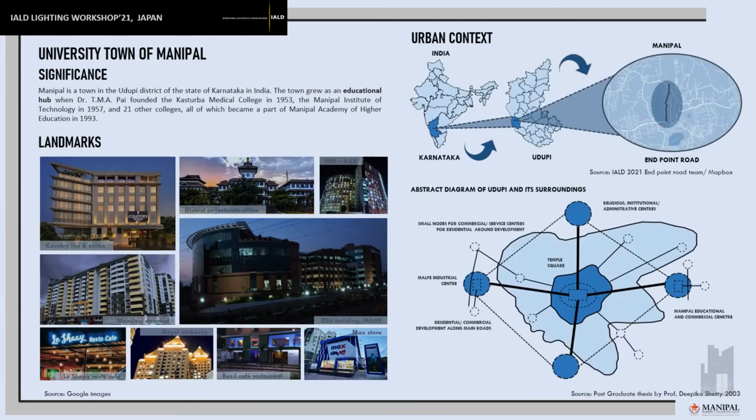Significant to the culture of the area, we have chosen this site based on the following 3 reasons: the health and education centers, the nightlife, and the tourism. Lighting can be used to enhance the more important structures and landmarks, showcase the vibrant nature of the nightlife, and highlight the attractive tourist spots.

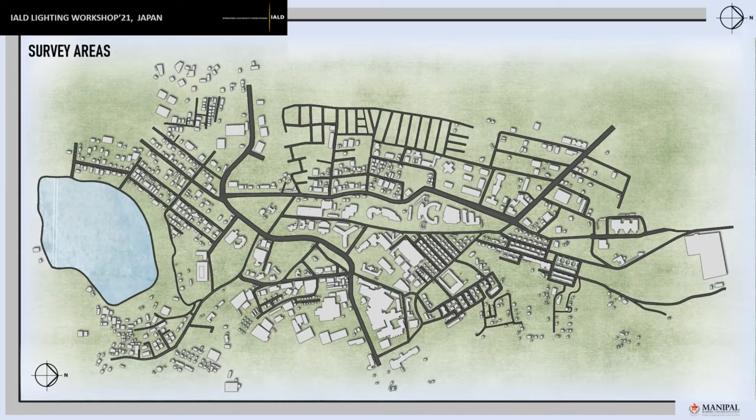Analyzing the survey area of our site, we have the existing road network, the figure-ground relation, and the key nodes: DC office, the Upendra Pai Memorial, colloquially known as Coin Circle, the commercial area, and Syndicate Circle. The site extends from the DC office to the Syndicate Circle.

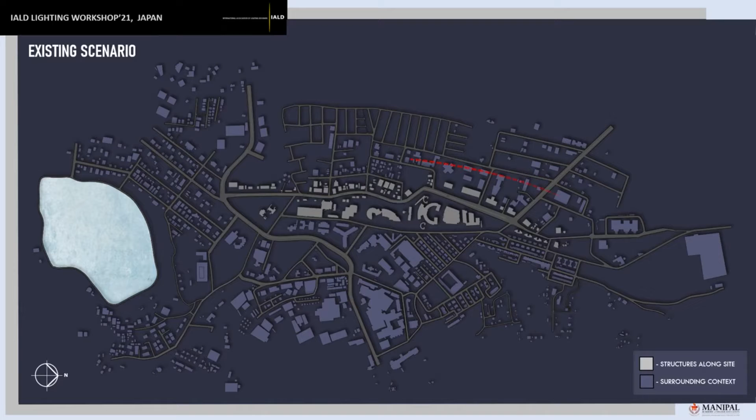Now, we shall move on to the existing scenario of the site. The context is that of the Endpoint Road, with the 4 nodes labeled here. The highlighted portions mark out the important structures present along the site, which make up the survey area, contrasted with the surrounding context. The key nodes we have studied are shown here, each having different land use patterns and offering different lighting schemes.

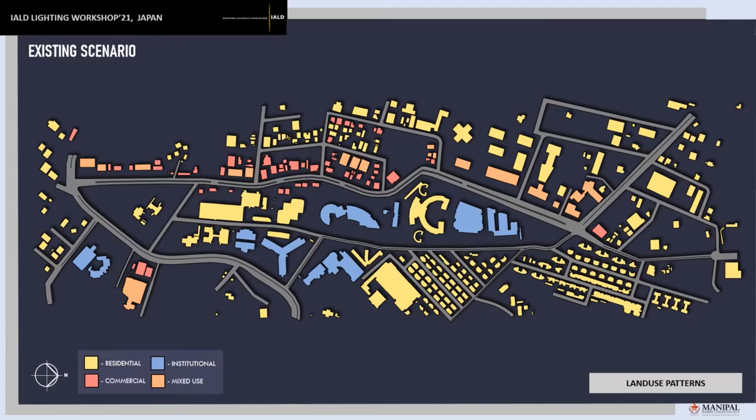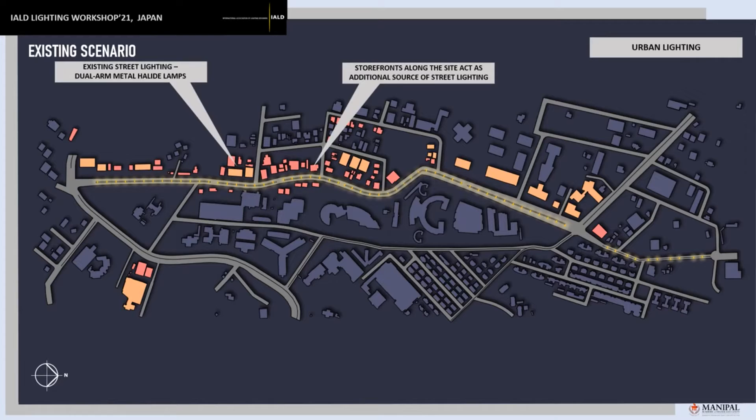Public transport is sparse on site but can be easily accessed from the same. Existing street lighting is mainly metal halide lamps, with additional lighting provided by commercial establishments. Node 1 has large dark zones and is isolated.

Node 2 is an active street with visual discomfort due to vehicular glare. Node 3 has adequate visual scope despite the presence of dark zones. And Node 4 is a traffic junction with adequate but reduced visual scope.

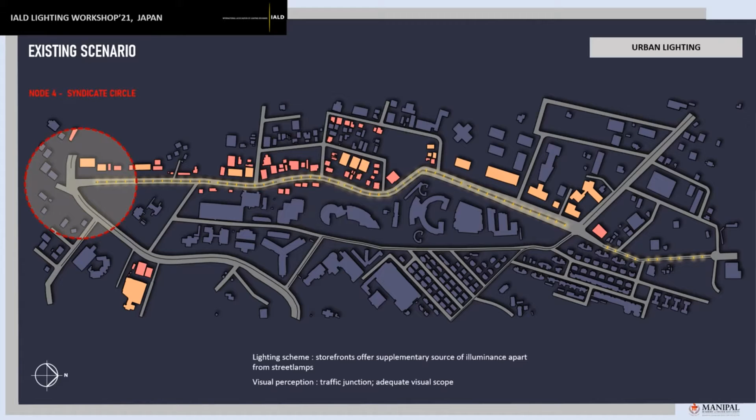Now, we move on to the heroes of this site. Our first hero is the emphasis of key urban elements with the use of lighting on nodes 2 and 3. The highlighted areas are a vibrant and important part of the identity of Manipal city. They act as landmarks, each with different lighting schemes consisting mainly of spot and accent lighting, which enhance the overall legibility of the town.

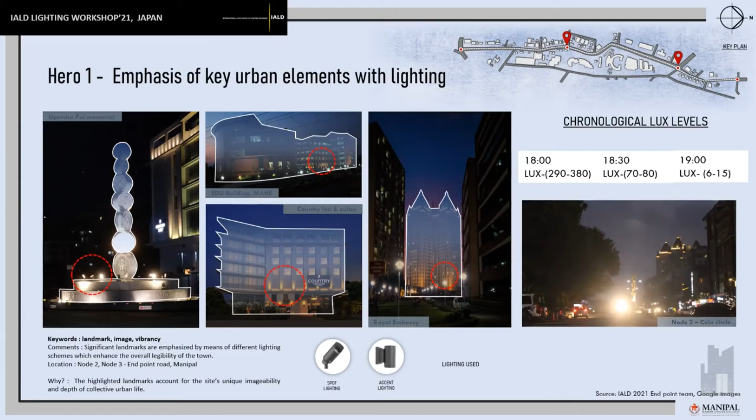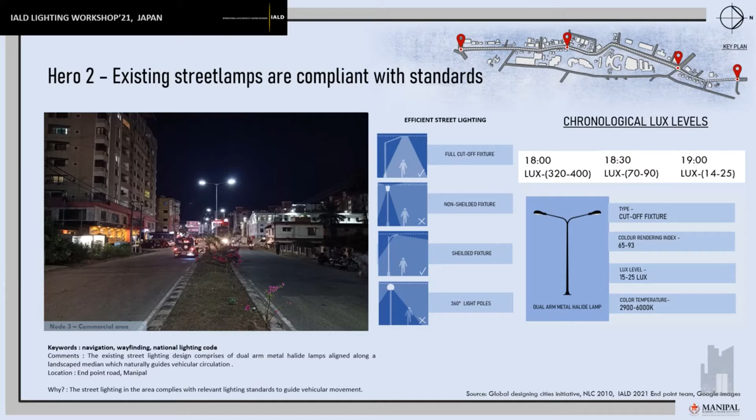These qualities give the site value and account for their continued usage and depth of collective urban life. Our second hero, which is prevalent throughout the site, is the compliance of the existing street lighting with the lighting code standards. The metal halide lamps used are shielded cut-off fixtures, which is one of the most efficient forms of street lighting.

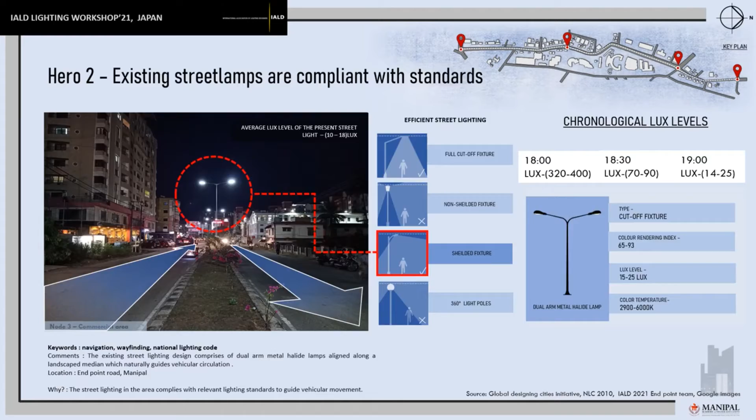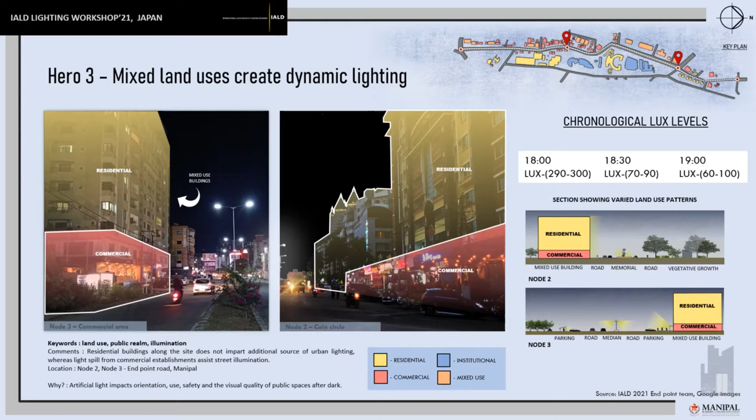These are aligned along a landscaped median, hence naturally guiding the vehicular circulation. Our third hero, emphasized on nodes 2 and 3, is the dynamic lighting created by the mixed land use structures present on site. The residential buildings do not impart additional urban lighting, whereas commercial establishments assist in street illumination. This light impacts the orientation, use, safety, and visual quality of the space after dark. The sections used highlight how the varied land use patterns impact the lighting.

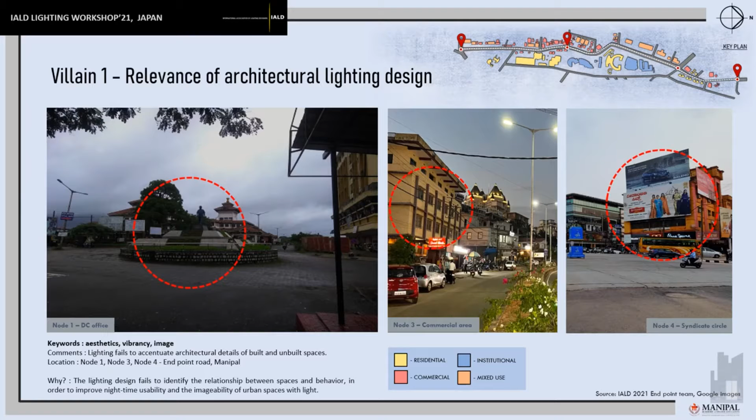Now, we shall discuss the villains of this site. Our first villain, present mostly on nodes 1, 3, and 4, is the absence of relevant architectural lighting design. Lighting fails to accentuate the urban details of the built and unbuilt spaces, which leads to a lack of vibrancy in the design. Nighttime usability and livability of the urban spaces are not enhanced by way of the lighting design due to this failure of identifying the relationship between the spaces and human behavior.

The second villain, mostly present on nodes 3 and 4, is the failure of the lighting design to complement the cultural character of the town. The local character of the neighborhood is not reflected through innovative patterns of illumination and lighting schemes in either the building facades or the street lighting, which is disappointing when considering the rich heritage and culture of Manipal. It fails to establish an urban identity by way of emphasizing perceptible characteristics and enhancing imageability of the town.

The third and final villain, present throughout the site, is the failure of the lighting to support pedestrian navigation. There is a distinct lack of illumination at the crosswalks and pedestrian pathways, and the absence of signages and demarcated pathways together hinder the navigation ability of pedestrians and creates dangerous streets for them.

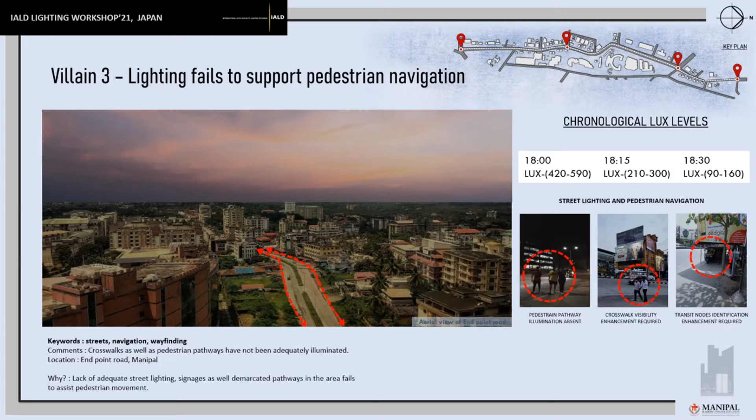After conducting our analysis of the site, we have reached the conclusion that there are a few elements that cannot be classified as heroes or villains alone due to their complexity and multifaceted presence.

First of this category is the light spill from storefronts, present on nodes 2, 3, and 4. These public storefronts act as an additional source of street lighting in the form of accent and spot lighting, recessed fixtures, flood lighting, and LED billboards, which allow after-dark activities and extend the use of urban spaces. The street culture stands out without relying on external lighting sources, along with being a source of illumination for the streets. On the other hand, these storefronts also cause sky glow and glare formation due to excess light spill. This element, along with the use of unshielded fixtures by the commercial establishments, lead to light pollution, which is especially dangerous since this lighting guides vehicular and pedestrian movement as a secondary form of street lighting.

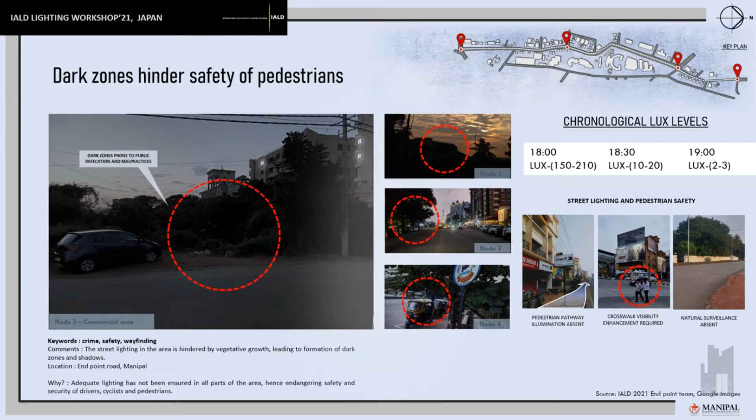The second example of this category is the presence of dark zones throughout the site, which hinders the safety of the users, notably pedestrians. The vegetation present on the side of the roads covers any street lights present, leading to large dark zones and shadows, along with a possible rise in crime. Illumination is sparse for the pedestrian pathway, and natural surveillance is all but absent. Lack of adequate lighting in the site endangers drivers, cyclists, and pedestrians alike.

However, these dark zones are useful to mitigate the excess light spill, most notably on Node 2, where the storefronts and their light spill are most dangerous to vehicular and pedestrian safety. These zones are a reprieve from the harsh lighting of the street and provide an element of security to pedestrian movement. With this, we conclude our analysis of Endpoint Road, Manipal, and we shall now move on to the second site, Krishna Matha in Udupi.

Moving on to the lighting analysis of Site 2, the Udupi Sri Krishna Matha.

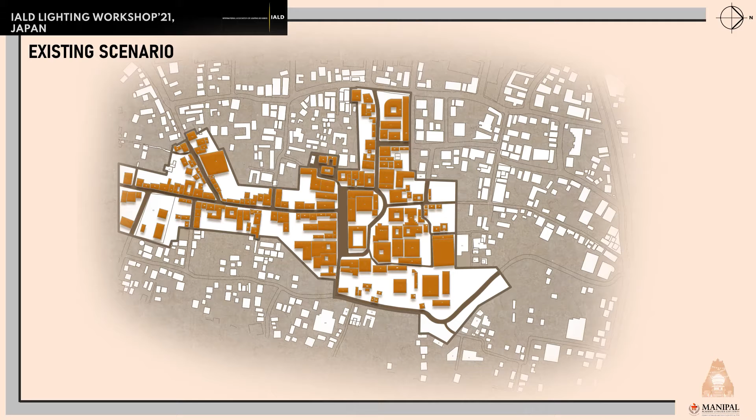Here, we have mapped the existing scenario of the temple site that we have taken into consideration. Since our site area is quite large, we have divided the areas into 3 zones for ease of reference. The spaces and heritage structures are oriented around the car street, also known as the Ratha Bidi, which is the central circulation area. Around the same are the ancillary roads, serving as commercial zones banked with small stores on the sides.

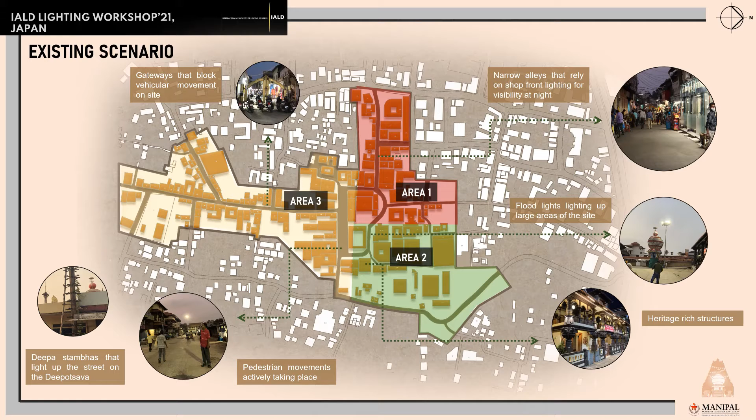These narrow alleys rely on shopfront lighting for visibility after nightfall. The gateways to the complex restrict vehicular movement, and the floodlights illuminate large spaces for activity and pedestrian circulation in the Ratha Bidi.

The role of light in our culture. As the ancient Sanskrit prayer goes, Tamaso Ma Jyotirgamaya, meaning, may the light of knowledge remove the darkness of ignorance and lead us from darkness to light. Light plays an important role in our culture and is an essential part of Hindu festivals.

During festivals such as Deepotsava, the temple complexes are lit with thousands of diyas or oil lamps, which are essential in Hinduism because it signifies purity, good luck, and power. Artificial lighting ranging from 2000 to 4000 Kelvin is ideal for the temple complex as it emulates the warmth of a fire and adheres to the religious context.

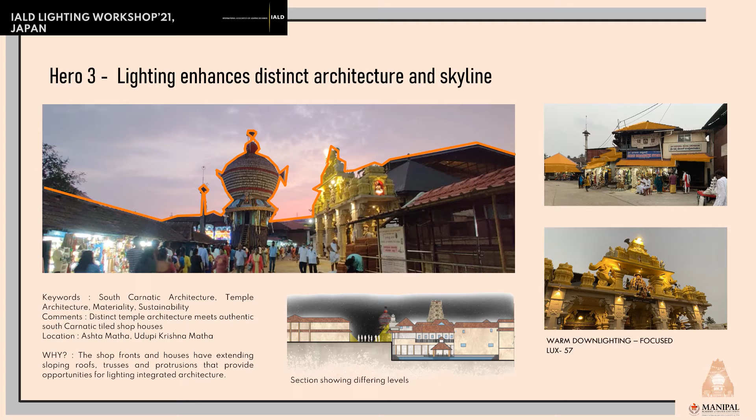On the right, we see that the strategically placed accent lighting enhances specific architectural details of the temple facade after nightfall and prevents light from escaping onto other surfaces and overly brightening the outdoor lighting scheme, and doesn't add to the area's overall lux. In Hero 4, the pedestrian-centric design with restricted vehicular access helps to reduce the number of street lamps and the intensity of light needed within the site.

Now, coming to the villains identified. In Villain 1, the dark zones at street corners create dead space. Due to only 4 floodlights present in the temple complex area, some areas and nooks remain dark and obscure with little or no activity.

In Villain 2, the absence of architectural lighting design. The emphasis given to the matha and the temple facades and the entrances through lighting is insufficient considering the value that they possess.

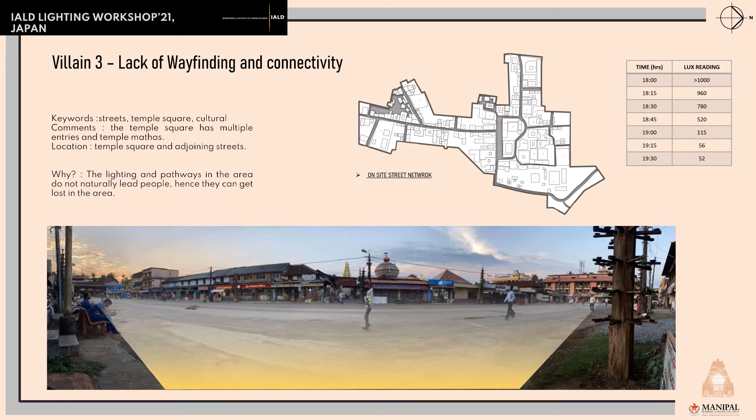In Villain 3, the temple square has multiple temples and mathas. The lighting and pathways in the area do not naturally serve as a wayfinding technique to lead people to the prime spaces, and visitors may face confusion.

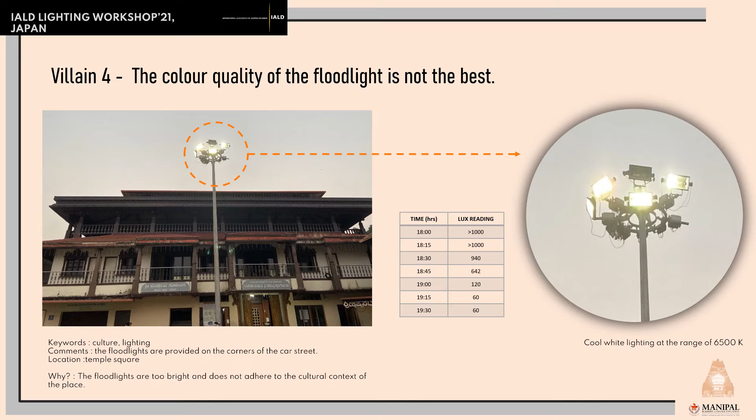In Villain 4, as mentioned earlier, the lighting color preference for a temple complex traditionally is a warmer tone ranging from 2000 Kelvin to 4000 Kelvin, which emulates a comfortable and peaceful ambience. But the usage of bright, cool white floodlighting provided at the corners of car street, even though helpful for wide illumination, disrupts the feeling of warmth and comfort within the space.

Some aspects on site act as both heroes and villains as per their context.

User activities and street culture at night stand out on their own instead of relying on external street lighting sources, making it more energy efficient. At the same time, the streets in and around the temple area lack street lighting and rely more or less on storefront lighting itself for illumination. But as these sources of light are unregulated, unsuitable lighting conditions may occur. Considering both these contexts, this aspect can act as both a hero and a villain.

From the earlier discussion, we determined that the site relies on storefront lighting, cutting off the dependency on conventional streetlights. This practice is sustainable and efficient, but due to some alleys and streets not having enough storefront lighting and no streetlights as well, the required illumination may not be achieved, hence being both a positive and a negative.

With this, we conclude the analysis of the Krishna Matha temple site. Next, we will be moving on to our third site, the lighting analysis of Malpe Beach.

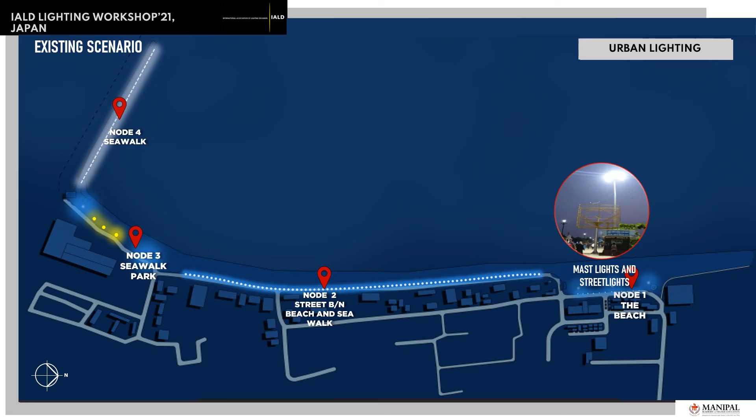Now here's a broad look at the urban lighting scheme of the whole area, starting with Node 1, where we mostly see mast lights and street lights. In the second node, we have an array of streetlights throughout the road.

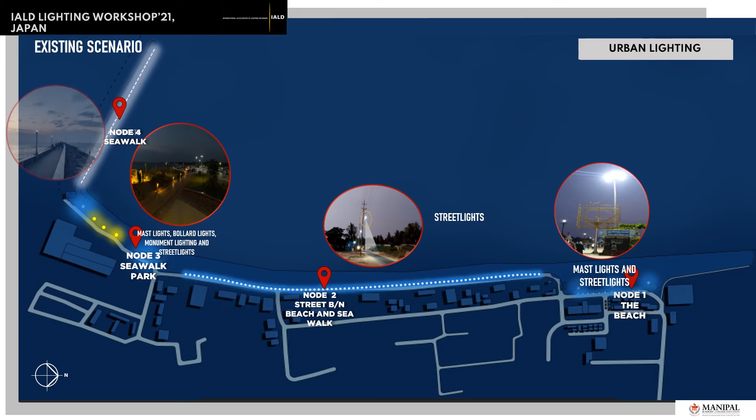Further, at node 3, we see a variety of outdoor lighting schemes that are both functional and aesthetic due to the park and dock area. The final node is the sea walk, which again has an array of lampposts.

Now we shall look at a couple of heroes identified in this site. This image is from our first node, which has quite a number of commercial activities. The lights at these shops are turned on by 6 p.m. daily and serve as a main source of illuminance along with an array of streetlights opposite to it, providing sufficient illumination during the peak hours of footfall after dusk.

Additionally, these shops are at a distance and height away from the sea surface, making it safe for the sea animals. Since it is always bustling and well lit, it feels secure for people too.

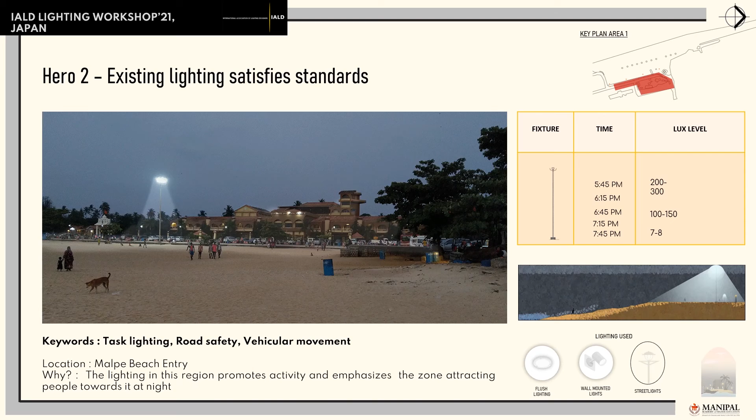To explain the second hero, we take an example of the lighting scheme at the first node. Since this area is bustling with commercial and industrial activities, adequate task lighting is extremely important to guide vehicles along the path without affecting people. The existing lighting seen here satisfies these standards. The mast light provides illumination to assist industry vehicles, light up the conflict zone nearby, and help people navigate through the beach. The pedestrian lights achieve the same by maintaining a proportionate scale with respect to the people and adequate lux levels of 5 to 10 lux. The entire site follows this and has standard lux levels at all points.

Our next hero is from Node 3, which is one of the main activity zones in our site. Here, the lighting generates a sense of motion awareness as it helps with wayfinding at the park. In addition, most of the lights in the park are low-lying, which is why there isn't any light spill towards the sky, thus providing a sensible way of lighting.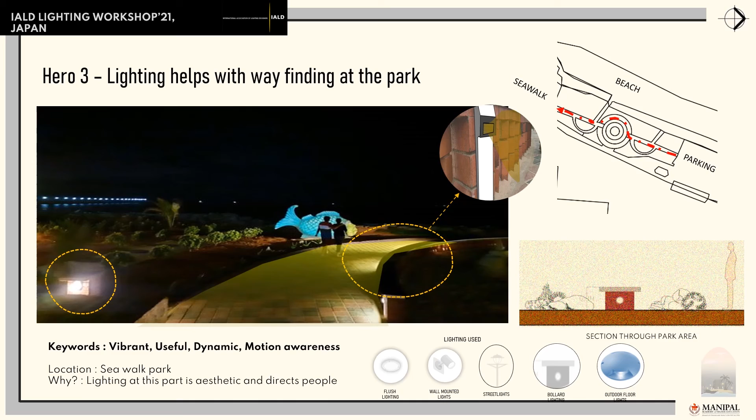We know how culture is an integral aspect to personify a place, and likewise to bring in an essence of that, monuments and statues in public places are the best way to do so. We can see how this whole site has a number of statues and monuments spread out around it, thus bringing in a factor of singularity and a common identity. With monuments, lighting comes into play as an important factor, and this provides us with an opportunity to explore the subject.

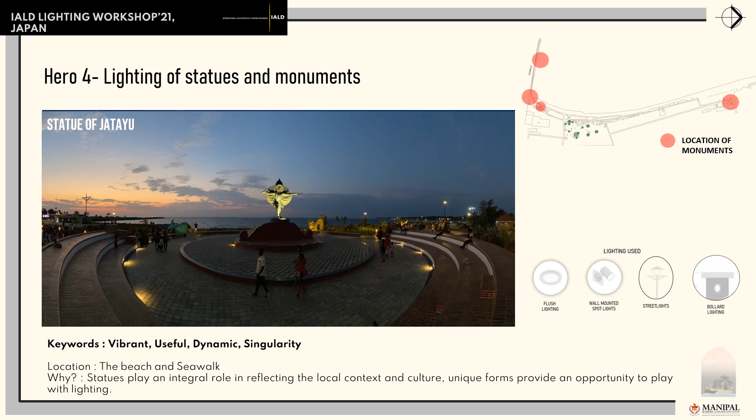Moving on to the villains that we've identified, the first is at the beach, the first node, where lights used in activity areas such as for games make use of random bright lights by the owners, which gets reflected directly on the beach surface, disrupting the marine life. It confuses the zooplankton and phytoplankton, making them go deep underwater and allowing algae to settle at the surface, thus polluting the sea.

The next villain is how dark spots and glare generated at different zones in the site make it unsafe and unpleasant for users. While the lighting follows standard lux levels, the luminaires used are inappropriate to the site, causing light spill. This, along with the awkward positioning of lights, creates dangerous dark spots as well, reducing the overall visual scope of the area.